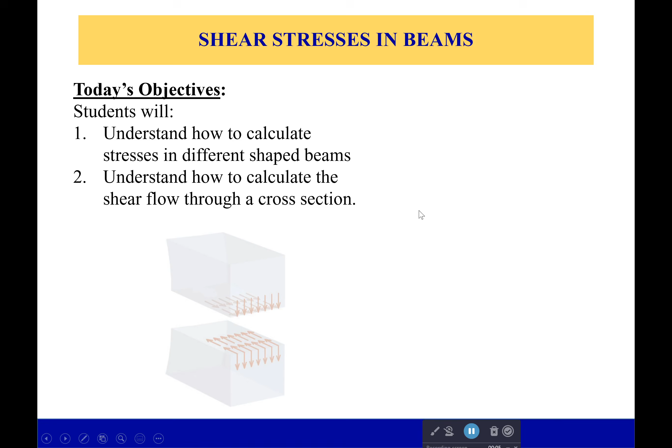Hi everyone. Now let's continue with chapter 9 today by looking at some different situations. For one, we're going to look at shear stresses in circular beams and also learn about this thing called shear flow. So let's jump right into it.

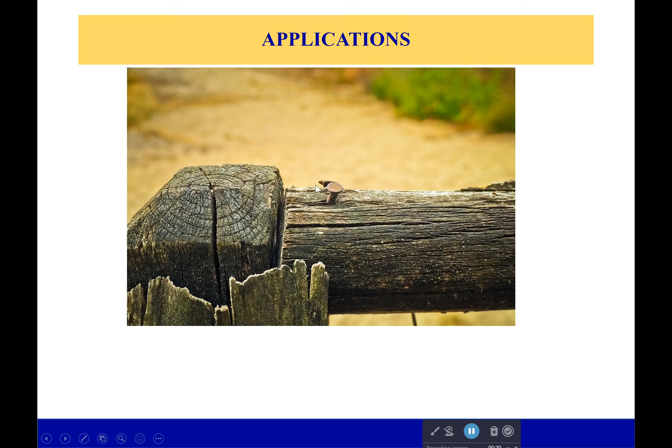So first off, here is a post. What you might see is that post has been nailed together. Now, that's obvious. Nails are used to hold several pieces of wood together. We've seen that before. However, what you might not always realize is sometimes we build up beams that way. You'll have a few beams and some bolts holding them together to make them stronger. For me, that's actually in my deck.

My deck extends out over the side of my house. There's some very large beams underneath it, and those beams are made up of wood with metal in between and then some more wood, all sandwiched together with some bolts. And it works wonderfully. My deck hasn't fallen down yet, and hopefully it won't in the future.

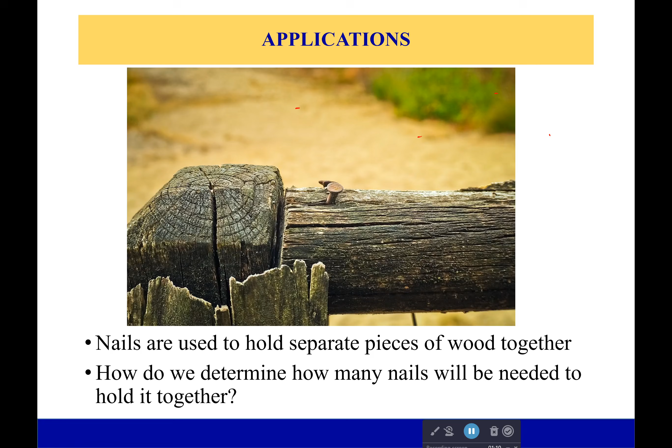But the question here is, how many bolts are needed in my case, or nails in the case of this little post, to actually hold it together? Because I really don't want to walk out there one day and have my deck collapse because there weren't enough bolts to hold it all together. So how do we figure that out? Well, that's a question we're going to be answering today.

Now, the weird thing about circular cross-sections is the shear stress does not actually stay parallel to the y-axis over the entire surface, which is why we only do it through the centroid. That's the only point we're going to care about. So we'll find out that shear force and shear stress that's acting at the neutral axis.

So, what is that? Well, for a solid circular cross-section, the value of Q is going to be simply 2/3 times r cubed. And that's just taking the centroid and multiplying it by the area, and some things cancel when we do that.

So, if we want to, we can also put that in terms of diameter, which looks pretty nice. And then we can actually calculate our max shear stress.

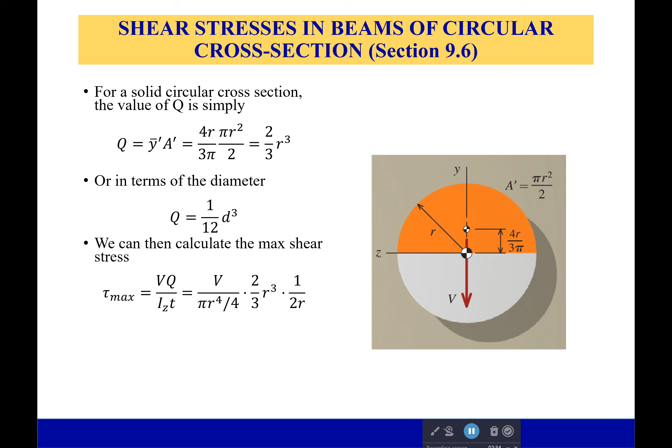So our shear stress max is going to be equal to our shear force times Q over the moment of inertia times the thickness. And we plug that into our equation, and we have right here our shear stress, our moment of inertia, our shear force. We have right here the value for Q that we got earlier, and then we have our value of the thickness right here, which is going to be the diameter.

And it comes out to be 4V over 3A. So 4 times the shear force over 3 times the area. Okay, that's helpful. And also, just in case you didn't know, the moment of inertia equation for a circle is right here. So use this to help you.

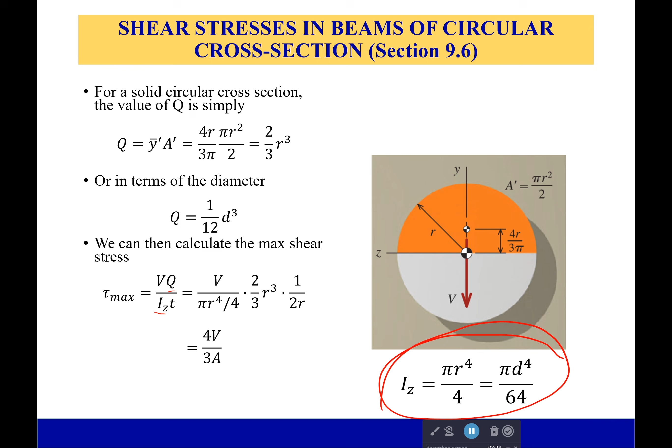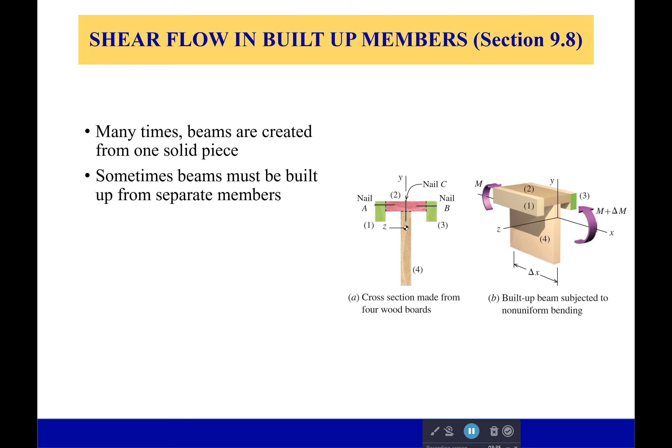But now let's jump into what I talked about earlier, about how there are built-up beams, we have nails. How do we determine the number of nails to use? So when we build these beams from separate members, the nails, or fasteners as they're usually called, have to overcome the shear force induced in the members by the internal bending moment. There's that shear force, and that shear force is trying to cut through these points where they're joined, and those nails are having to resist that shear force.

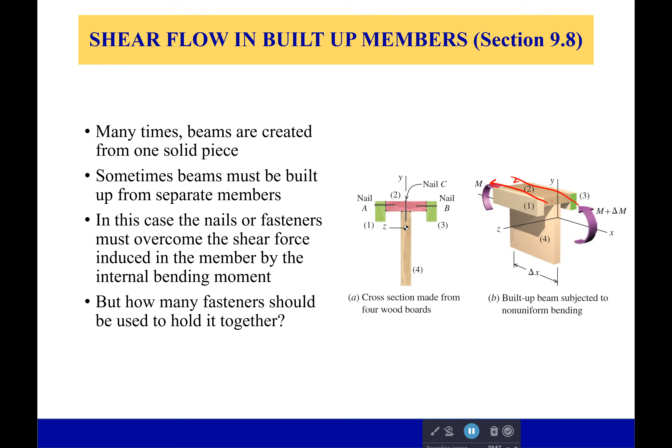But still, how many do we need to keep it together? Well, if we look at this little section right here, and this is one of the side X sections, there's that shear force that's trying to cut it off, we might be able to figure this out.

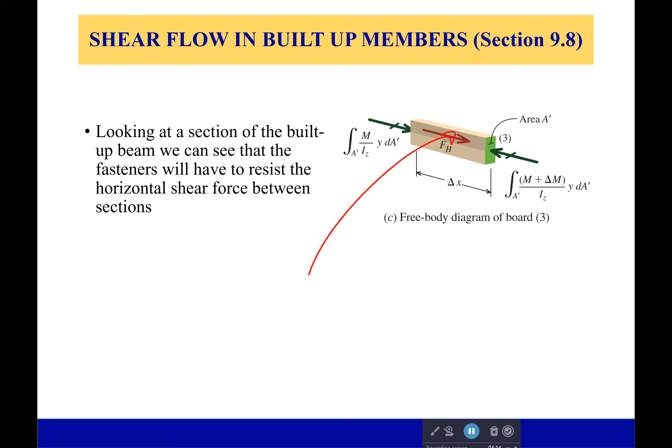So these fasteners are going to have to resist that particular shear force. And that shear force for this little section is going to be something similar to this, where we are simply saying that the change moment is equivalent to my internal shear force, not this horizontal shear force, the internal shear force, times the distance it's along.

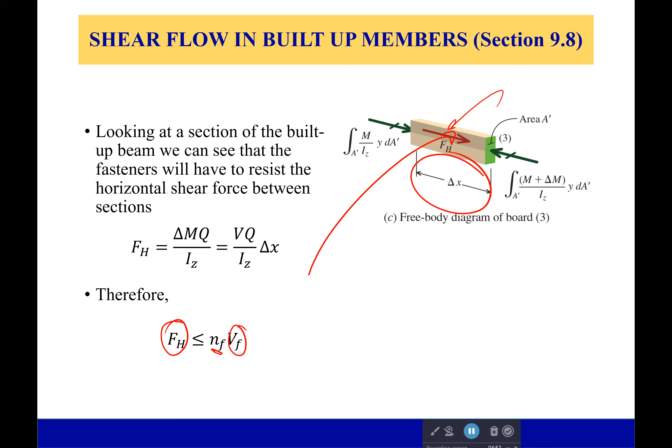And if we do that, then we can say, okay, this horizontal shear force has to be less than the number of fasteners times the amount of force that they can resist. This is the shear force that these fasteners can resist.

So if we want to make a little bit more sense, we can try to change things and put it in terms of the spacing of the fasteners, as well as their allowable shear stress, which is normally what you're going to see. You won't see a force they can resist, at least not most of the time. Instead, you'll see a shear stress they can resist. So we can say this horizontal shear force has to be less than or equal to the number of fasteners times the shear stress they can resist times this area.

This S right here is the spacing in between each of my fasteners, and this is something called the shear flow. It's simply a way the shear force per unit length of the beam changes and moves through your particular member. Now this is going to be really helpful, so don't forget that equation. Write that one down. And also this one right here. Both of those are going to be helpful when you're solving these problems.

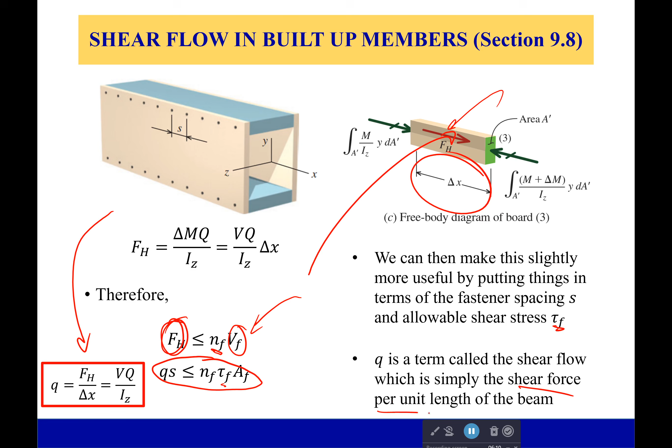As I said, it's the shear force per unit length, and here's that shear force per unit length. Or you can calculate it this way if you wish.

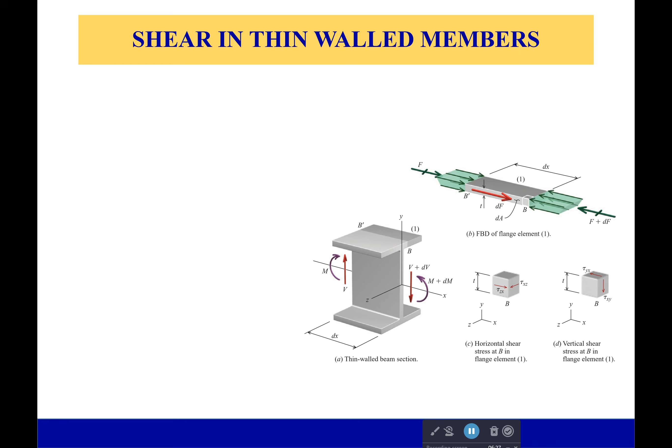Now what about in these thin-walled members? I'm going to run through this because there's not too much left, and I don't want to make a second video just for this. But using what we've just learned, we can start to calculate the shear stress inside a thin-walled member. The reason for that, and we can figure out the overall system, is because that shear stress has to be parallel to the face. So if it's right in here, it has to be going down because that's parallel to the face. Over here, it has to be going to the side because that's parallel to the face. It's always parallel to the face.

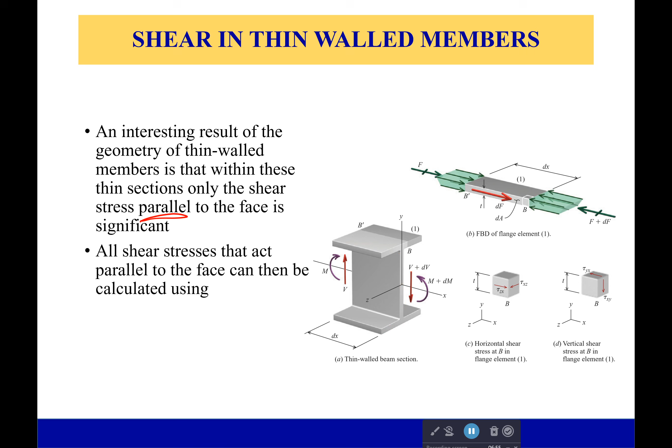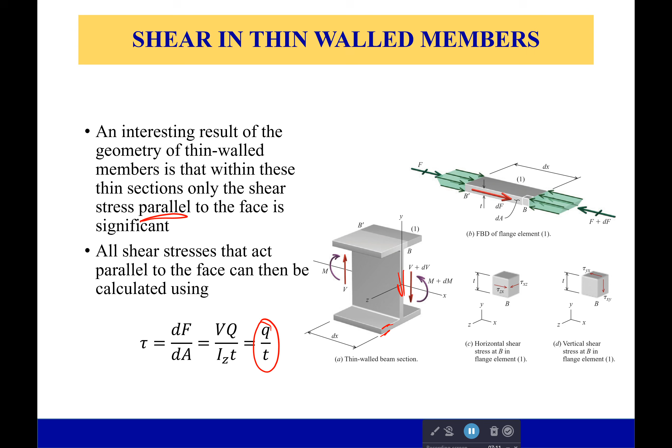And so all shear stresses that are parallel to the face, which is all of them in these thin-walled members, can be calculated simply using this formula, which is simply the shear flow over the thickness. What is the thickness at this point, or right here? If we know the shear flow and we can divide by the thickness, we can calculate our shear stress at any particular point we want.

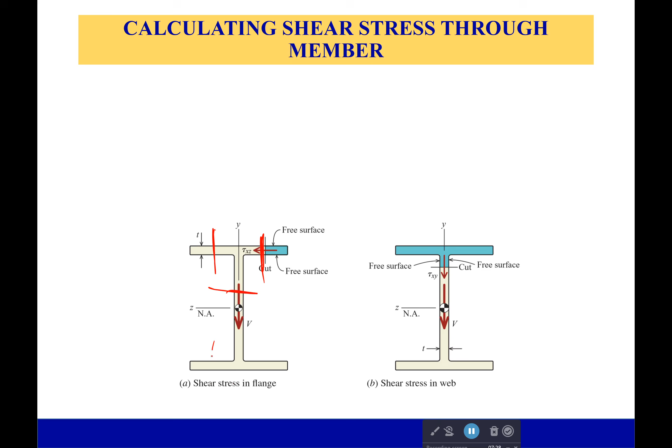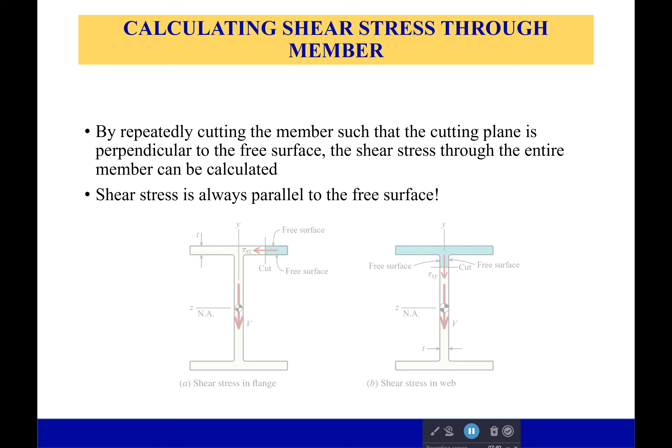So what you do then is you keep on cutting. You cut at a particular point you care about, you calculate the shear stress there. Then you cut over here and calculate the shear stress there, and you cut here, and keep going through until you have a good view of what the system is going to be. A good view of what the system is going to be. And then eventually, depending on what you're doing, you'll have the shear stress for the entire system. And this works for any particular thing.

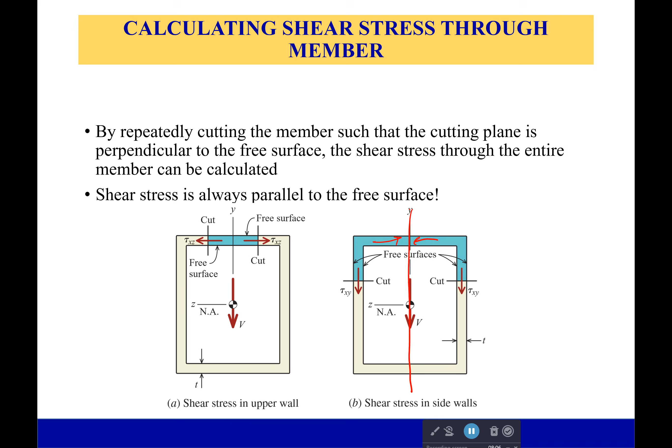And finally, once you've done this, you will have the overall stress and shear flow diagram for your particular system.